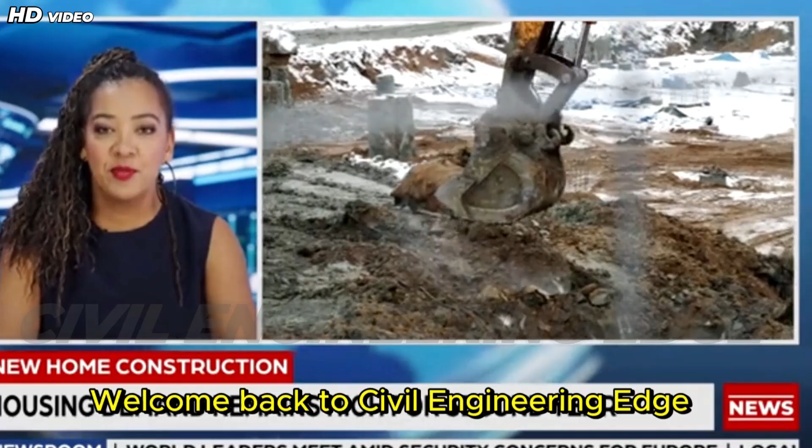Today's topic is not science fiction. It is not architectural fantasy. It is one of the most urgent engineering challenges of our time: how to build cities that float. Across the globe, coastal megacities are facing irreversible threats from rising sea levels, land subsidence, and intensifying storm surges. Traditional civil engineering solutions like seawalls, embankments, and land reclamation are proving to be temporary defenses against a permanent problem.

As professional civil engineers, researchers, and students, we must ask ourselves a bold question. If water is inevitable, why not design for it? In this episode, we will explore the engineering principles behind floating cities, focusing on hydrostatic equilibrium, buoyancy stability balance, modular honeycomb pontoons, and dynamic mooring systems. We will bridge theory with structural feasibility and examine how floating infrastructure may become the most resilient foundation for future civilizations. Let's begin. The reality of rising tides.

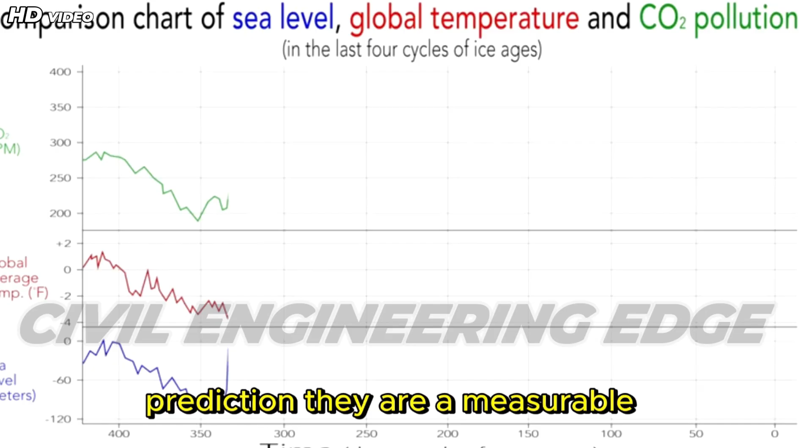Global sea levels are no longer a distant environmental prediction. They are a measurable engineering reality. According to long-term climate observations and oceanographic data, global mean sea levels have been rising at an accelerating rate over the last 3 decades. The implications for civil infrastructure are profound. Coastal regions are economic powerhouses. Over 40% of the global population lives within 100 kilometers of a coastline. These regions host ports, industrial corridors, airports, highways, power plants, and dense urban settlements. Yet, they are simultaneously the most vulnerable to storm surges, tidal amplification, and saline intrusion.

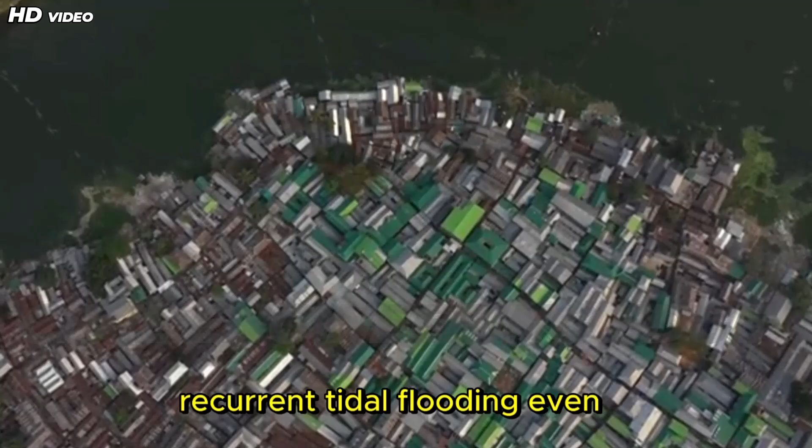Cities like Jakarta are sinking due to groundwater extraction and soft soil consolidation, compounding sea level rise effects. Miami experiences recurrent tidal flooding even without storms. Shanghai faces storm surge risks in one of the most densely populated deltas on Earth. From a structural perspective, the challenge is not just rising water levels, but dynamic loading from waves, tides, and extreme cyclonic events. Conventional foundation systems, isolated footings, raft foundations, and deep piles depend on stable soil strata.

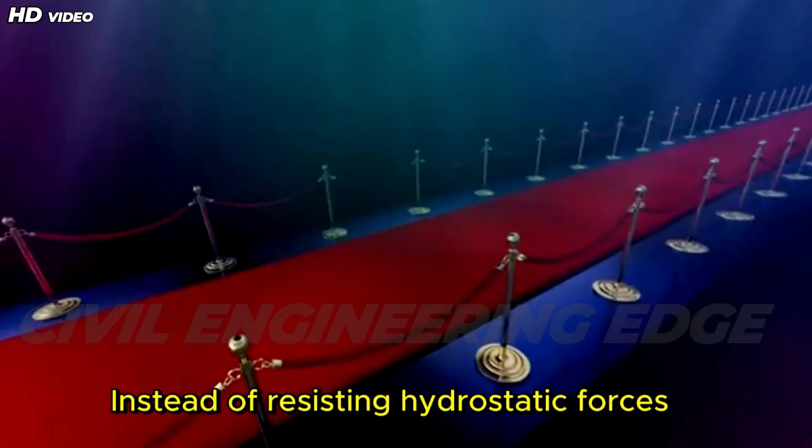But what happens when the soil itself becomes unstable due to erosion, liquefaction, or prolonged inundation? This is where traditional land-based engineering reaches its limitation. We are trying to anchor permanence in an increasingly fluid environment. Floating cities shift the design paradigm entirely. Instead of resisting hydrostatic forces, we embrace them. Instead of rigidly fixing structures to soil, we allow controlled movement through buoyancy-balanced platforms. By analyzing Archimedes' principle, center of buoyancy, metacentric height, and dynamic stability under wave excitation, engineers can design habitable structures that adapt rather than resist. The rising tide is not just an environmental crisis, it is a design challenge demanding innovation.

Reviewing current 2026 satellite data on coastal erosion and displacement risks. By 2026, satellite-based Earth observation systems provide unprecedented clarity on coastal transformation. Data from missions such as NASA and European Space Agency reveal accelerating shoreline retreat across multiple continents. Satellite altimetry measurements indicate consistent global sea level rise trends, while synthetic aperture radar (SAR) imagery highlights coastal subsidence in delta regions. Thermal imaging and ocean salinity mapping show expanding saltwater intrusion into freshwater aquifers, directly threatening municipal water supplies.

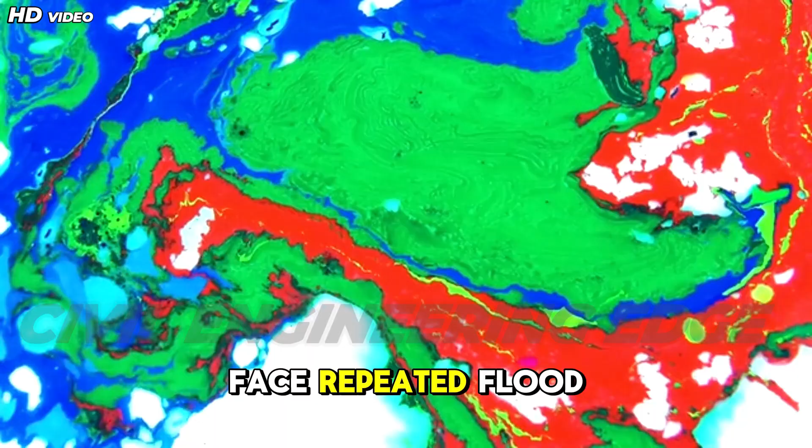Major urban hubs face immediate displacement risks. Low-lying island nations in the Pacific show measurable land loss. Delta cities experience both vertical land subsidence and horizontal shoreline erosion. Industrial port zones face repeated flood damage, disrupting global supply chains. By integrating satellite-derived digital elevation models, DEMs, with predictive hydrodynamic simulations, engineers can now model 50-year and 100-year flood scenarios with improved precision. The alarming conclusion: many coastal infrastructures were never designed for the magnitude and frequency of flooding now being recorded.

From a civil engineering standpoint, these data sets are not merely environmental indicators, they are design inputs future infrastructure must account for: higher baseline sea levels, increased storm surge heights, stronger cyclic wave loading, extended flood durations. Satellite data confirms a critical insight. Retrofitting existing coastal defenses may not be sufficient in highly vulnerable zones. In several metropolitan regions, managed retreat or adaptive infrastructure may become more economical than continuous repair and reinforcement.

Floating infrastructure emerges as a strategic alternative. Instead of constantly elevating land-based structures, floating systems automatically adjust to changing water levels, maintaining consistent freeboard height relative to the water surface. In essence, satellite evidence validates the engineering logic behind maritime urbanism. Why traditional seawalls and land reclamation are no longer viable long-term.

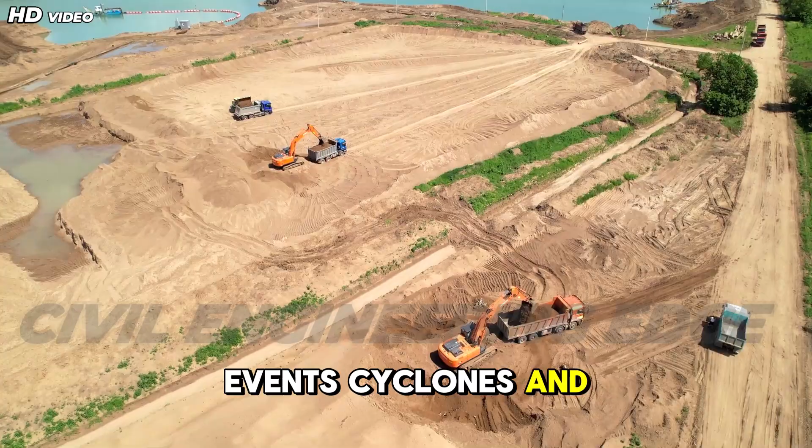Second, extreme weather events, cyclones, and superstorms generate surge levels that exceed original design assumptions. Designing for increasingly rare return periods, like 1 in 500-year storms, dramatically increases construction cost and carbon footprint.

Third, land reclamation projects require extensive soil stabilization, sand filling, and deep foundation systems. In delta regions with compressible clay deposits, long-term settlement becomes inevitable. Continuous maintenance becomes economically unsustainable.

Take, for example, Tokyo and New York City, both of which have invested heavily in coastal protection. While engineering efforts are impressive, the financial and environmental costs are immense and still not future-proof against accelerating sea level rise. Additionally, rigid coastal barriers disrupt marine ecosystems, sediment transport cycles, and tidal flow patterns. This can worsen erosion elsewhere along the coastline.

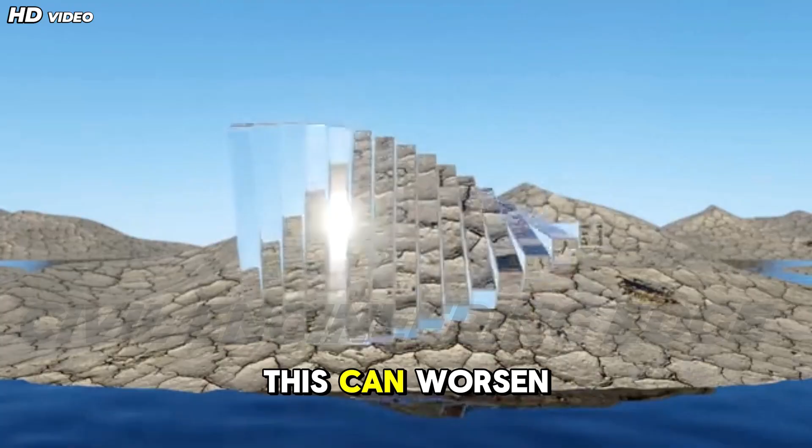From a structural systems perspective, seawalls represent a static solution to a dynamic problem. They assume that water levels can be permanently contained. But as global baselines rise, containment becomes progressively more complex and expensive.

Floating infrastructure, by contrast, does not resist rising water, it rises with it. Instead of increasing wall height every few decades, buoyant platforms maintain structural elevation automatically through hydrostatic equilibrium. Thus, the shift from rigid defense to adaptive design becomes not only logical but inevitable.

From fighting water to living with it: the rise of maritime urbanism. The concept of maritime urbanism challenges centuries of land-centric city planning. Instead of reclaiming land or fortifying coastlines, engineers design habitable environments directly on water surfaces.

Floating architecture is not new. Traditional floating villages have existed for centuries. However, scaling this concept to urban density requires advanced civil and marine engineering integration.

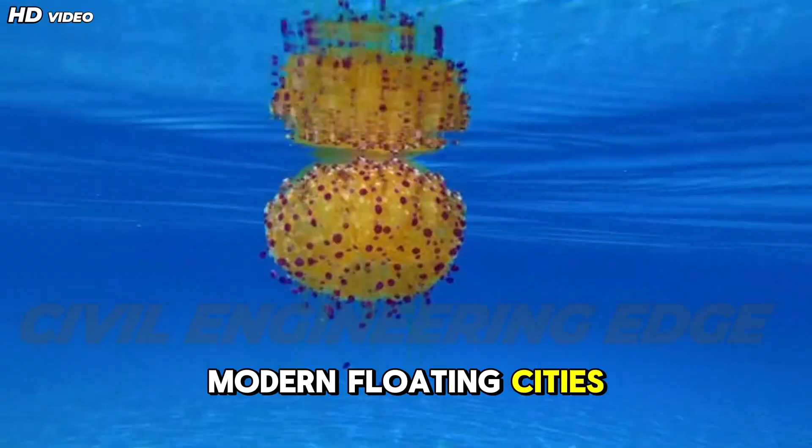Modern floating cities rely on modular honeycomb pontoons for distributed buoyancy, reinforced composite materials for corrosion resistance, dynamic mooring systems that absorb wave energy, and flexible utility networks for water, power, and waste.

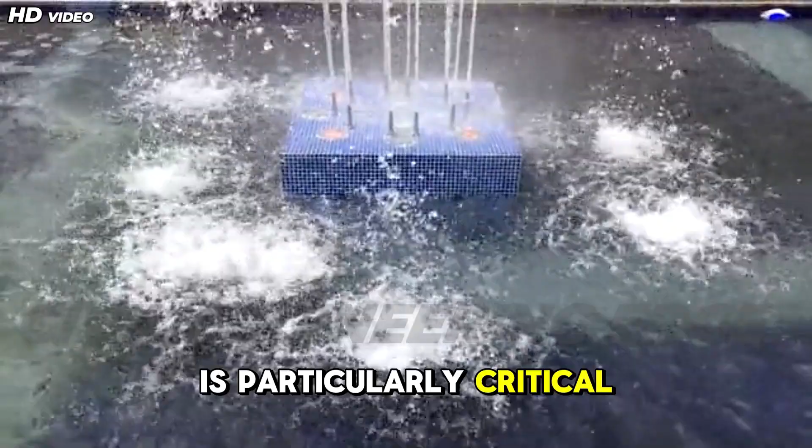The honeycomb pontoon configuration is particularly critical. By dividing large platforms into interconnected hexagonal buoyant cells, engineers achieve redundancy, enhanced stability, and improved load distribution. If one compartment is compromised, the entire structure remains operational.

Dynamic mooring systems using tension leg anchors or semi-taut moorings allow controlled horizontal movement while preventing drift. This reduces structural stress during tidal fluctuations and storm surges.

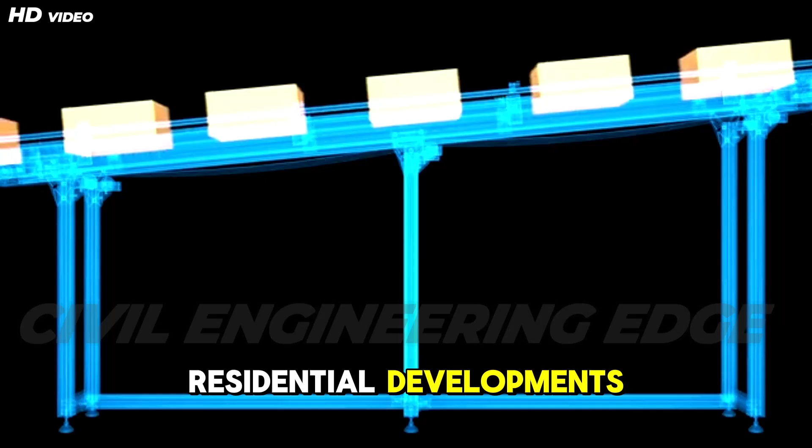Countries like the Netherlands, known for advanced water management strategies, are actively researching floating residential developments. Engineering firms are prototyping floating neighborhoods that integrate renewable energy systems and self-sustaining infrastructure.

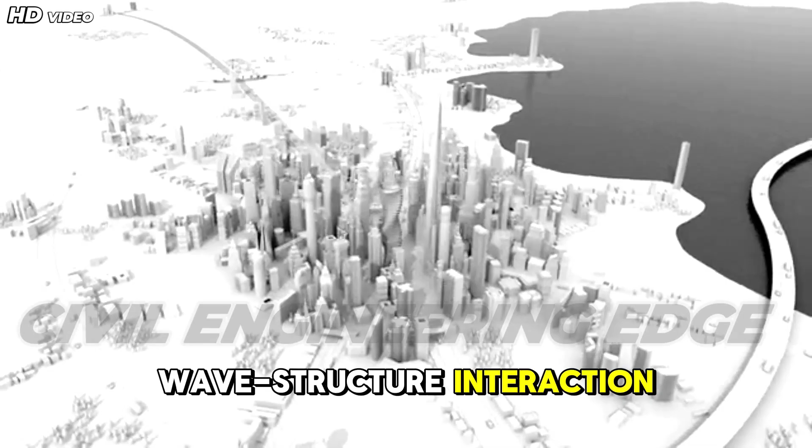From a hydrostatic standpoint, the key lies in maintaining proper metacentric height to ensure roll stability under wave excitation. Structural modeling must incorporate wave-structure interaction, fatigue analysis, and corrosion life cycle design.

Maritime urbanism represents a philosophical shift in civil engineering, not dominance over nature, but intelligent coexistence. Floating infrastructure does not surrender to rising seas. It adapts, stabilizes, and evolves with them.

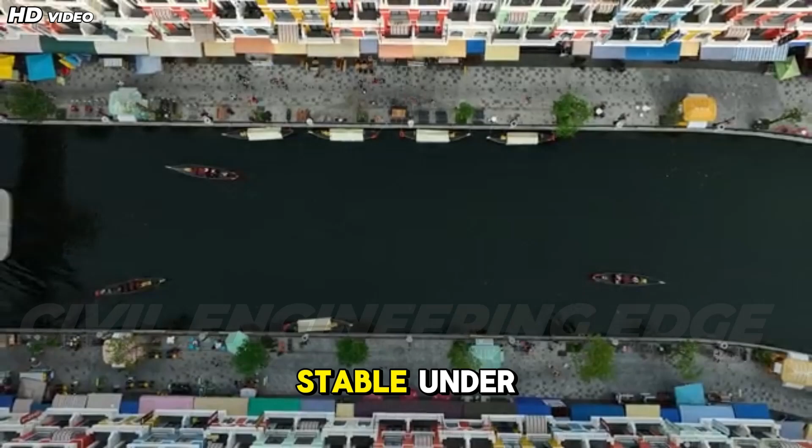The buoyancy stability paradox. When we speak about floating cities, the first engineering question that arises is simple yet profound. If something floats, can it remain stable under variable urban loads? This is what we call the buoyancy stability paradox.

In conventional marine engineering, buoyancy ensures flotation, but stability ensures survivability. For floating urban infrastructure, both must be optimized simultaneously at an unprecedented scale.

Buoyancy, governed by Archimedes' principle, states that a body immersed in fluid experiences an upward force equal to the weight of the displaced fluid. However, in large-scale floating platforms supporting buildings, vehicles, utilities, and dynamic human occupancy, flotation alone is insufficient. Stability becomes the controlling design parameter.

Unlike ships, which are designed for mobility and forward propulsion, floating cities must behave as semi-permanent, quasi-static structural systems. They must resist rotational instability (roll, pitch, and yaw), differential settlement effects due to uneven loading, and dynamic forces induced by waves, wind, and tidal surges.

The paradox lies in this. Increasing buoyancy through larger displacement volumes may enhance load carrying capacity, but can simultaneously reduce metacentric stability if the geometry is not optimized.

Professional civil engineers must analyze hydrostatic equilibrium conditions, ensuring that the center of gravity G, center of buoyancy B, and metacenter M maintain a stable relationship under both static and dynamic loading. The metacentric height GM must remain positive and sufficiently large to prevent capsizing tendencies.

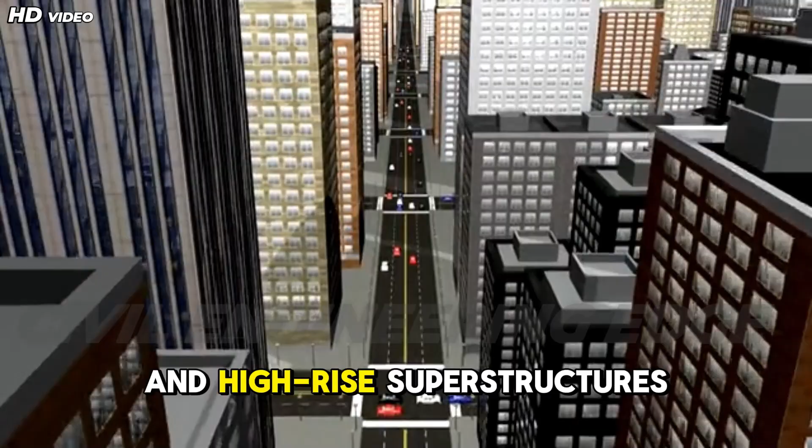Moreover, floating cities face unique urban load complexities: moving crowds, traffic clusters, localized infrastructure loads, and high-rise superstructures. These loads are neither uniform nor constant. Therefore, solving the buoyancy stability paradox requires integrating marine hydrodynamics, structural engineering, geotechnical analogs, and advanced materials science.

Only through modular platform geometry, distributed buoyancy systems, and dynamic anchoring can floating cities achieve the stability required for permanent habitation.

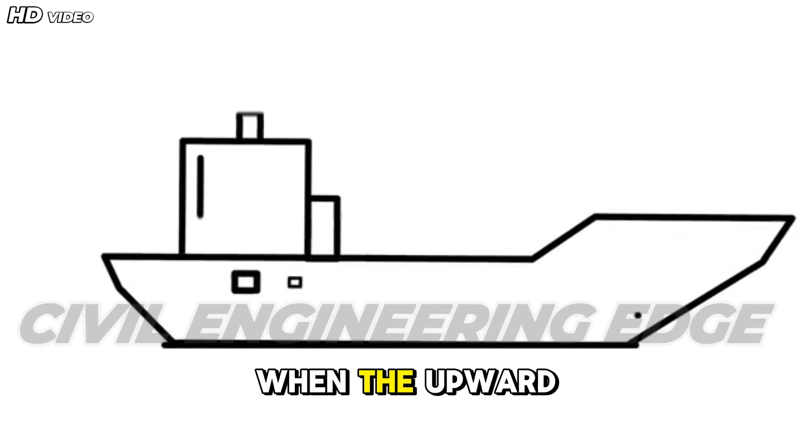Hydrostatic equilibrium and why traditional ship designs fail as permanent urban foundations. Hydrostatic equilibrium is achieved when the upward buoyant force equals the downward gravitational force acting on a floating body. In naval architecture, ships are designed to maintain this balance while moving through water.

However, ship stability criteria differ fundamentally from the requirements of floating urban foundations. Traditional ships are optimized for forward propulsion efficiency, minimal drag resistance, controlled roll response, flexible loading conditions, and cargo distribution changes. Their hull shapes are typically streamlined with curved sections that reduce hydrodynamic resistance.

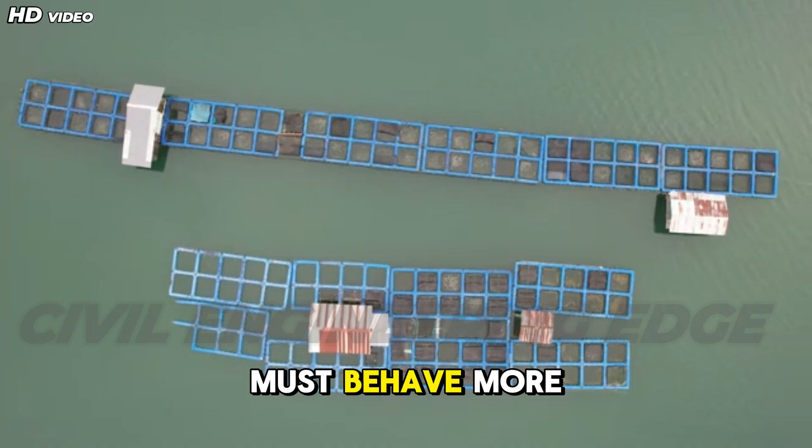While this geometry is ideal for movement, it is not ideal for stationary urban stability. For permanent floating cities, the structural system must behave more like a floating raft than a vessel. Ships rely heavily on ballast systems to adjust stability dynamically. In contrast, floating cities cannot depend on continuous ballast correction for everyday urban load variations.

Consider cruise liners or large maritime vessels. Even massive ships such as those operated by Royal Caribbean International experience noticeable roll motions during moderate wave conditions. While acceptable for transportation, such motion would be intolerable for residential or commercial urban life.

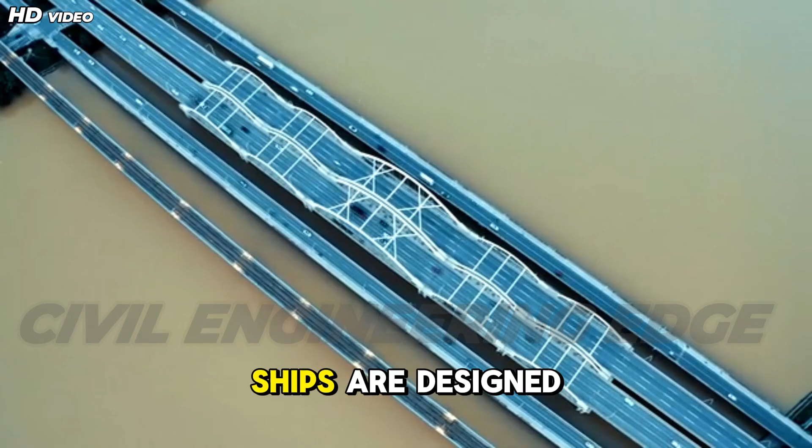Furthermore, ships are designed with high superstructures above the waterline, raising the center of gravity. This is manageable because the hull form and ballast compensate dynamically. But for floating urban platforms supporting multi-story buildings, excessive vertical mass concentration can reduce metacentric height and increase overturning risk.

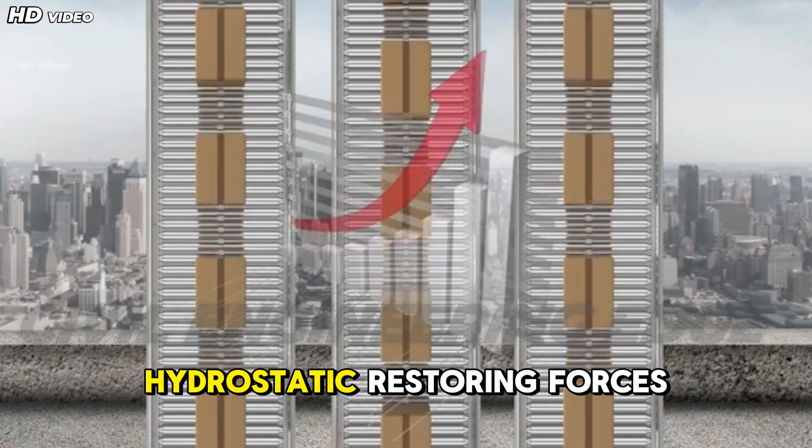Urban infrastructure also introduces rigid vertical loads: columns, shear walls, and core systems that behave differently from flexible ship superstructures. The response to wind-induced overturning moments must be considered alongside hydrostatic restoring forces. Therefore, traditional ship hull designs are insufficient for floating cities. Instead, wide-beam, flat-bottomed, multicellular pontoon systems offer greater transverse stability, reduced roll amplitude, and enhanced load distribution.

In summary, hydrostatic equilibrium for floating cities must prioritize long-term structural stability, not navigational performance. That distinction fundamentally separates maritime transport engineering from maritime urban engineering.

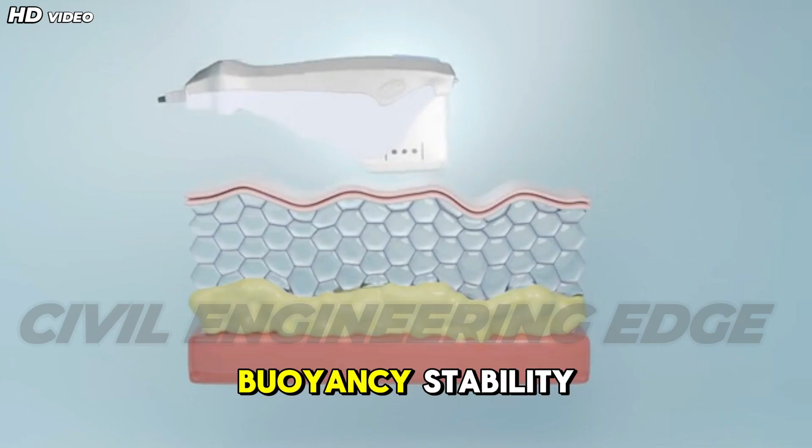Modular honeycomb pontoons and load distribution under uneven population density. One of the most innovative solutions to the buoyancy stability paradox is the use of modular honeycomb pontoon systems. Unlike single-hull floating platforms, honeycomb configurations divide the base into multiple interconnected buoyant cells arranged in hexagonal or grid-based geometry. Why honeycomb? Hexagonal geometry provides efficient space utilization, structural redundancy, and multi-directional load transfer.

Each cell functions as an independent buoyant chamber. When combined, they create a distributed flotation network rather than a single monolithic buoyant volume. In real urban scenarios, load distribution is never uniform. Imagine a floating city district where a stadium fills with 40,000 people. A commercial zone experiences peak occupancy. Residential towers vary in population density. Construction equipment concentrates temporarily in one zone.

If a single large pontoon supports all loads, uneven distribution may cause tilting or differential submergence. However, in a honeycomb system, localized loading increases displacement primarily in adjacent cells rather than affecting the entire platform. Each module can be designed with reinforced concrete or composite shell, internal watertight compartments, integrated utility corridors, load transfer beams

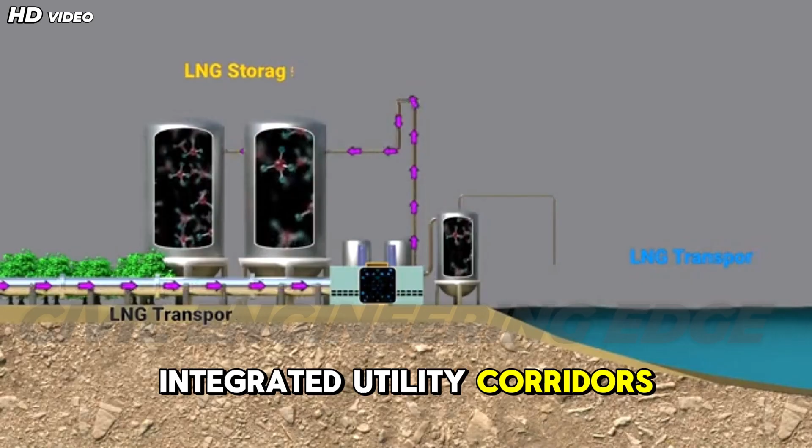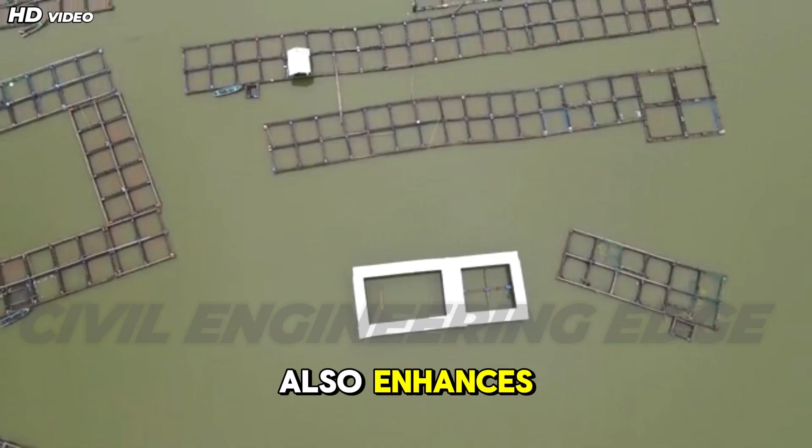connecting adjacent cells. When a localized load increases, the affected cells displace additional water, generating proportional buoyant force. Surrounding cells redistribute stresses through structural connectors, maintaining overall platform equilibrium. This modularity also enhances resilience. If one compartment is damaged due to collision or fatigue cracking, adjacent compartments maintain flotation integrity. This redundancy mirrors fail-safe principles used in offshore platforms and bridge engineering.

Countries such as the Netherlands have pioneered floating residential prototypes using modular platforms that demonstrate remarkable transverse stability under variable loads. From a structural analysis perspective, engineers must model load combinations (dead load plus live load plus environmental load), differential buoyancy response, shear transfer between modules, and fatigue due to cyclic wave loading.

The honeycomb pontoon system transforms floating cities from fragile floating decks into robust, scalable, and adaptable structural foundations capable of supporting complex urban ecosystems. Center of gravity versus center of buoyancy during massive tidal surges.

The stability of any floating structure depends on the geometric relationship between three critical points: 1. Center of gravity G. 2. Center of buoyancy B. 3. Metacenter M. The center of gravity represents the resultant point of all downward forces acting on the structure, including superstructures, utilities, occupants, and equipment. The center of buoyancy represents the centroid of displaced water volume. Under calm conditions, G and B align vertically.

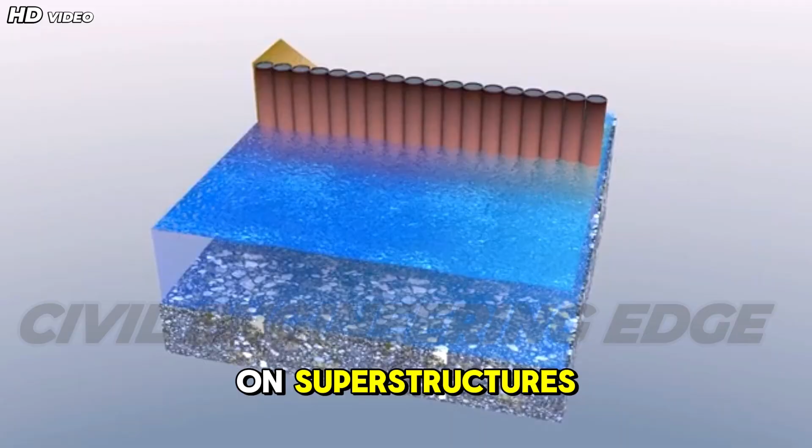During massive tidal surges, floating cities must handle sudden changes in water elevation, wave crest and trough differentials, lateral wind pressure on superstructures, and dynamic impact forces. If the center of gravity rises excessively due to tall buildings or concentrated rooftop loads, GM reduces. A small GM results in slow, large amplitude rolling, dangerous for structural systems and occupant comfort.

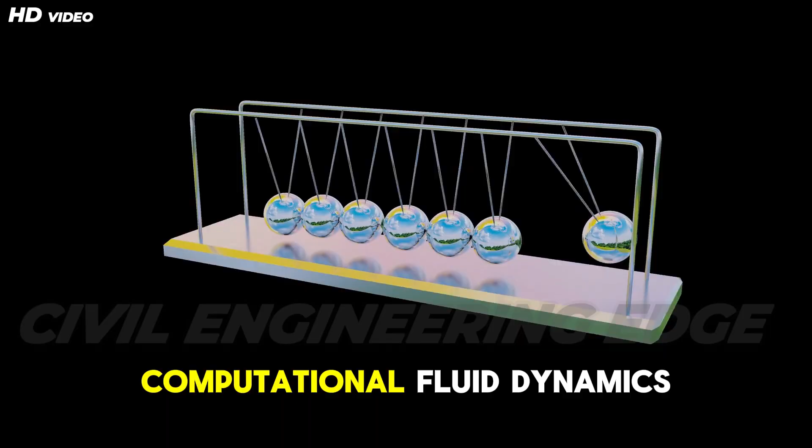Therefore, floating city design incorporates low-profile structural bases, distributed mass rather than vertical concentration, heavy infrastructure, water tanks, and mechanical systems placed near deck level, wide platform footprints to increase righting moments, and advanced computational fluid dynamics (CFD) simulations to model wave-structure interaction during extreme events. Offshore engineering practices used in oil platforms operated by organizations such as Shell plc provide valuable insight into dynamic stability under surge conditions.

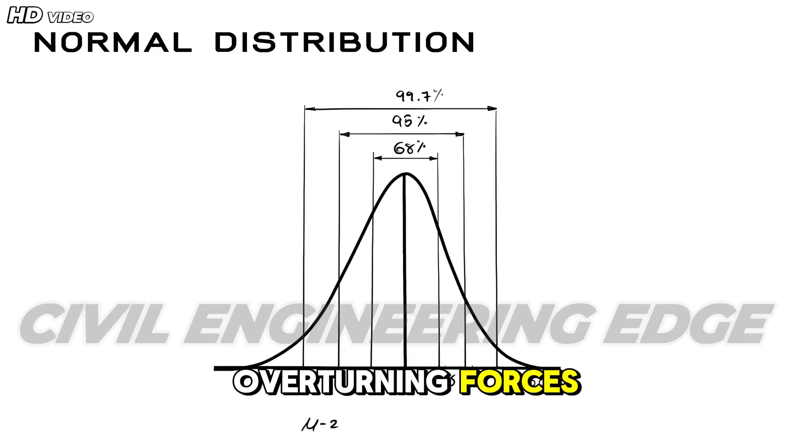The ultimate goal is controlled adaptability. As tides rise, the entire platform ascends uniformly. As waves induce tilt, restoring moments generated by buoyancy counteract overturning forces. By carefully managing the relationship between G, B, and M, floating cities can remain level, secure, and structurally sound even under the most severe tidal disturbances.

Advanced material science for longevity. If floating cities are to function as permanent urban ecosystems rather than experimental prototypes, material durability becomes the defining factor. Unlike conventional terrestrial structures, floating infrastructure is continuously exposed to aggressive marine environments, high salinity, chloride penetration, cyclic wetting and drying, ultraviolet radiation, biofouling, and constant dynamic loading. Over decades, these environmental stressors degrade traditional materials at accelerated rates.

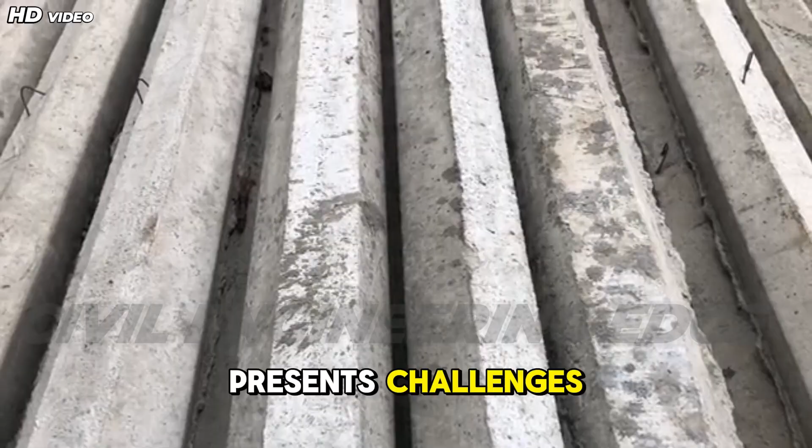Historically, marine structures relied on reinforced concrete and structural steel. While both materials have proven strength and versatility, their long-term durability in high salinity environments presents challenges. Chloride ions penetrate concrete cover, initiating corrosion in reinforcement bars. Steel components require continuous protective coatings and cathodic protection systems. Maintenance cycles become expensive and technically demanding, particularly in deep water conditions.

Advanced materials science in 2026 focuses on extending life cycle performance rather than merely increasing initial strength. The goal is to achieve 75 to 100-year service life with minimal intervention. This requires integrating corrosion-resistant composites, fiber-reinforced polymers (FRP), nano-enhanced concrete matrices, and hybrid material systems.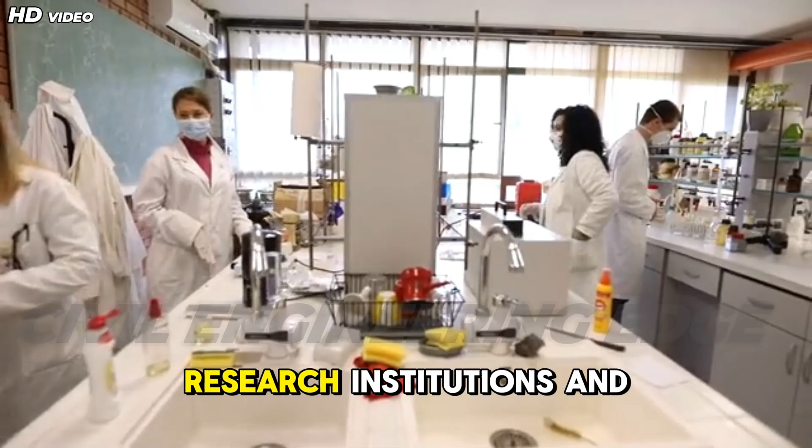Marine engineering research institutions and innovation programs supported by organizations such as MIT are developing high-performance composites that outperform traditional steel in corrosion resistance while maintaining comparable tensile capacity. These materials significantly reduce life cycle carbon emissions by lowering maintenance frequency.

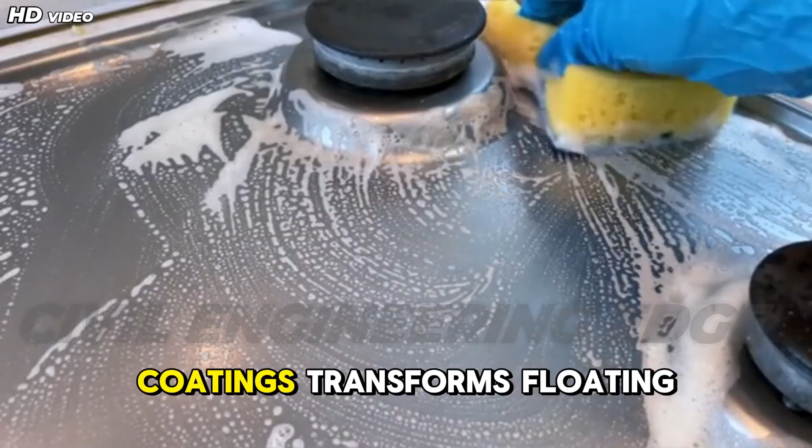Additionally, the integration of smart materials, self-healing polymers, and bioreceptive coatings transforms floating platforms into adaptive systems that strengthen over time instead of degrading. For professional civil engineers, this shift demands new design codes, new fatigue analysis methodologies, and new understanding of composite behavior under cyclic marine loading. Durability is no longer an afterthought, it is the foundation of floating urban resilience.

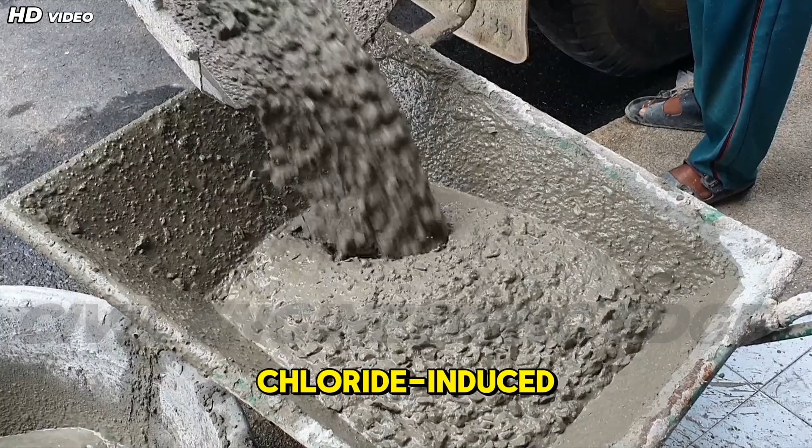Transitioning to 2026 grade corrosion-resistant composites. In high salinity marine environments, chloride-induced corrosion is the primary cause of structural degradation. Traditional carbon steel reinforcement, even with protective coatings, eventually experiences oxidation when chloride ions penetrate protective layers. This leads to cracking, spalling, and structural weakening. For floating cities designed to operate continuously offshore, such vulnerability is unacceptable.

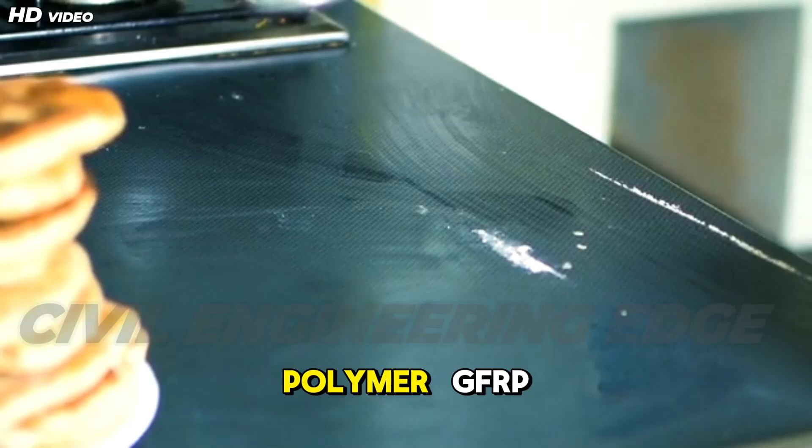The 2026 transition involves replacing conventional reinforcement and exposed steel elements with advanced corrosion-resistant composites. Glass fiber-reinforced polymer (GFRP), carbon fiber-reinforced polymer (CFRP), and basalt fiber composites are increasingly used as primary structural reinforcement alternatives. Unlike steel, FRP materials do not rust. Their tensile strength-to-weight ratio is significantly higher, reducing structural self-weight and lowering the center of gravity, an important factor in floating stability. Reduced weight directly enhances buoyancy efficiency and improves metacentric height.

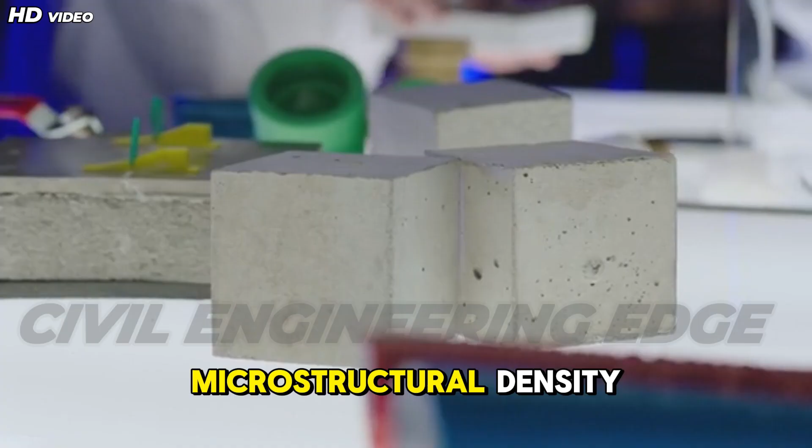Hybrid composite concrete systems now incorporate nanosilica additives, ultra-high-performance concrete (UHPC), and geopolymer binders that resist chloride penetration far better than traditional Portland cement concrete. These materials exhibit lower permeability and improved microstructural density. Marine-grade epoxy matrices used in composite systems are designed to resist ultraviolet degradation and hydrolysis.

Additionally, sacrificial anode systems are being supplemented with intelligent corrosion monitoring sensors embedded within structural members, allowing predictive maintenance rather than reactive repair. Research collaborations supported by organizations such as NASA have advanced composite technologies originally developed for aerospace applications. These high-performance materials are now being adapted for civil marine infrastructure.

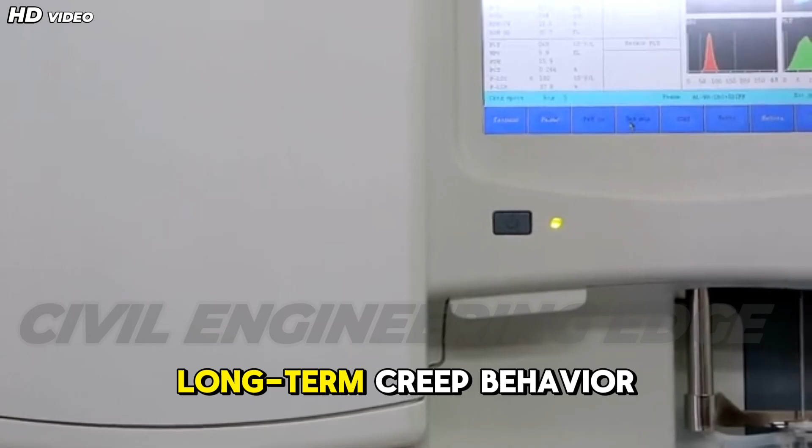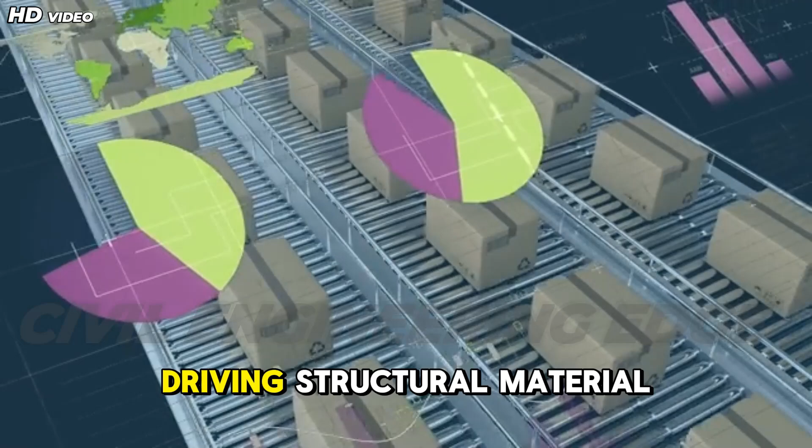However, composite materials introduce new challenges engineers must consider: long-term creep behavior, fire resistance and thermal expansion compatibility, connection detailing between composite and concrete, and fatigue performance under cyclic wave loading. Design codes are evolving to incorporate these materials into marine structural standards. The shift from steel-dominant systems to composite-integrated structures represents one of the most transformative changes in floating city engineering. Durability, weight reduction, and life cycle economy are now driving structural material selection.

Bioreceptive textures and coral strengthen structural bases. One of the most fascinating innovations in floating city infrastructure is the concept of bioreceptive surfaces, engineered textures designed to encourage marine life growth rather than prevent it. Traditionally, marine engineering viewed biofouling as a threat. Barnacles, algae, and coral accumulation were considered detrimental due to added weight and drag. However, the paradigm is shifting. Instead of resisting marine ecosystems, floating cities can integrate ecological engineering principles to strengthen their submerged structures over time.

Bioreceptive concrete incorporates microtextured surfaces and mineral compositions that promote coral larval attachment. Calcium-rich formulations and pH-balanced coatings encourage marine calcification. Over time, coral colonies attach and grow, forming a natural reinforcement layer around submerged pontoons. This concept is inspired by artificial reef projects and coastal restoration initiatives supported by organizations like the National Oceanic and Atmospheric Administration, which demonstrate how engineered substrates can accelerate coral regeneration.

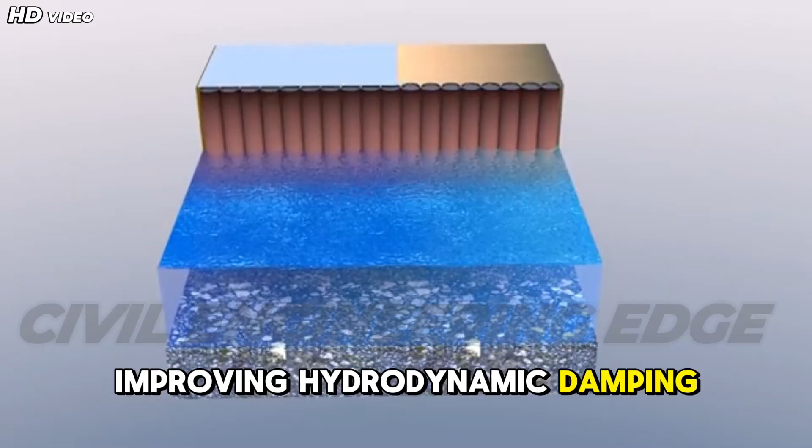From a structural standpoint, coral growth can increase surface roughness, improving hydrodynamic damping, provide additional protective layering against erosion, enhance local marine biodiversity, and improve structural integration with surrounding ecosystems. Careful structural modeling is required to account for additional dead load from marine growth. However, this load is typically distributed and incremental, allowing gradual adjustment in buoyancy calculations.

Bioreceptive materials also improve environmental acceptance of floating cities. Instead of displacing marine life, platforms become ecological hubs, supporting reef systems and fish populations. For civil engineers, this introduces interdisciplinary collaboration with marine biologists and environmental scientists. Material selection must balance structural strength, chemical stability, and ecological compatibility. Floating cities thus evolve into hybrid infrastructure, part engineered structure, part living marine ecosystem, strengthened naturally over time rather than deteriorating.

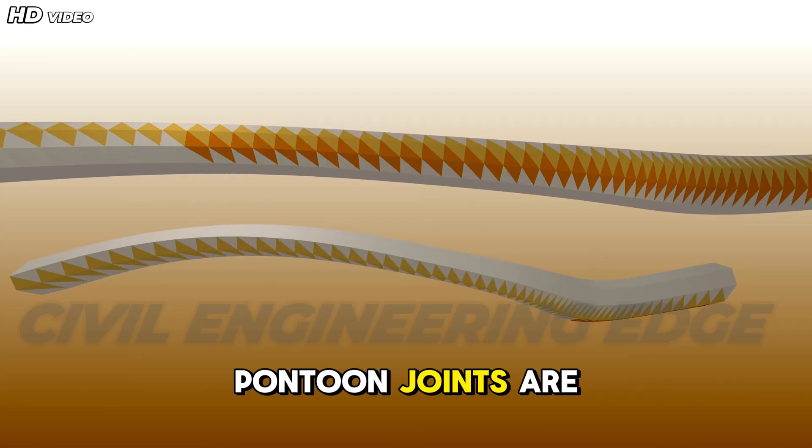Self-healing polymers in pontoon joints for deep water durability. Pontoon joints are critical stress concentration zones in modular floating platforms. These joints experience cyclic tensile, compressive, and shear forces due to wave action, thermal expansion, and dynamic loading. Over time, microcracks develop within connection materials, potentially compromising watertight integrity and structural continuity.

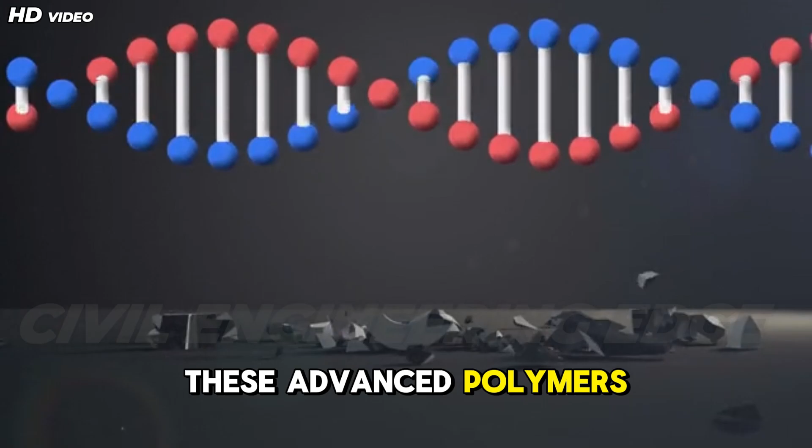To minimize long-term maintenance costs, engineers are integrating self-healing polymer technologies into pontoon joint systems. These advanced polymers contain microencapsulated healing agents or reversible chemical bonds that activate when cracks form. When microcracks appear, embedded capsules rupture, releasing bonding agents that chemically seal the crack. Other polymer systems rely on thermally reversible cross-linking reactions that reform molecular bonds after mechanical damage.

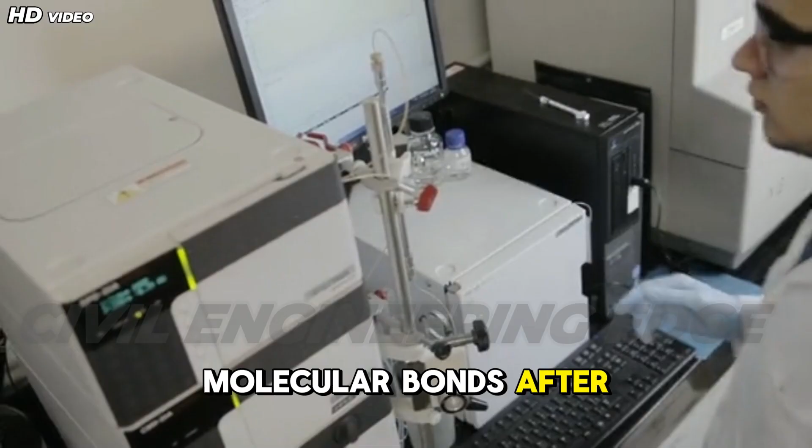Research programs supported by institutions such as Stanford University have demonstrated polymer systems capable of restoring up to 90% of original tensile strength after crack formation. In floating city applications, self-healing materials are used in flexible expansion joints between pontoon modules, waterproof membranes in submerged compartments, protective coatings on structural connectors, and composite joint interfaces.

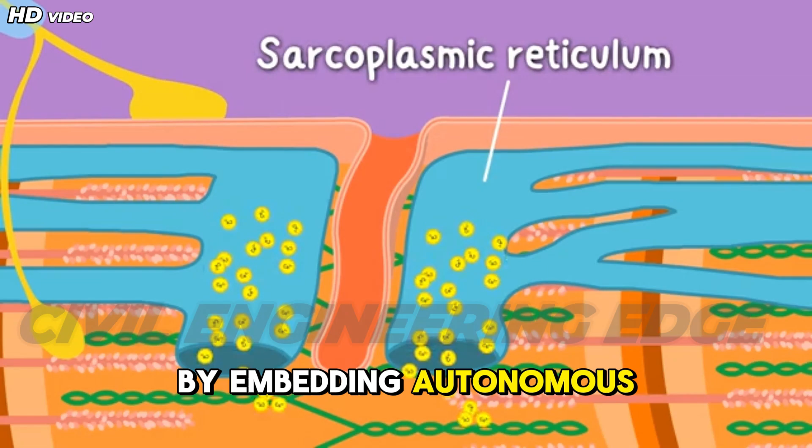The economic benefits are substantial. Offshore maintenance operations are expensive due to access constraints, specialized equipment, and safety risks. By embedding autonomous repair capability into the structure itself, life cycle costs are significantly reduced. From a structural reliability perspective, self-healing systems enhance redundancy. Small defects do not propagate into catastrophic failures. Instead, they are contained at microscale levels.

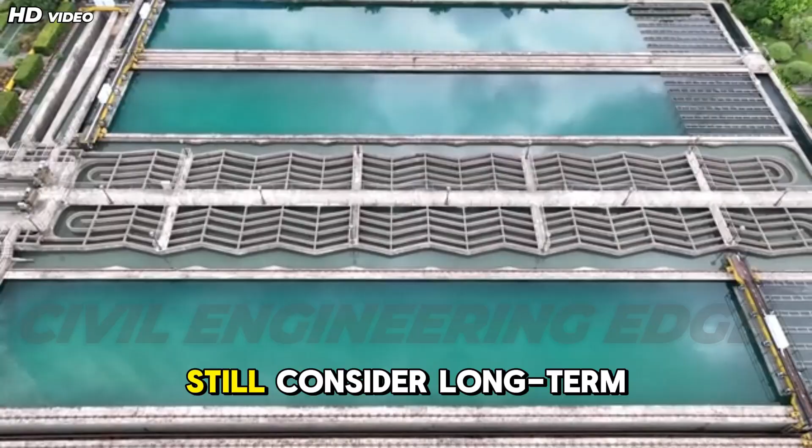Engineers must still consider long-term performance limits, healing cycle frequency, and environmental compatibility. However, early field deployments in offshore energy platforms show promising results. By integrating corrosion-resistant composites, bioreceptive surfaces, and self-healing polymers, floating cities transition from vulnerable marine structures to resilient, adaptive infrastructure systems capable of surviving decades in harsh ocean environments.

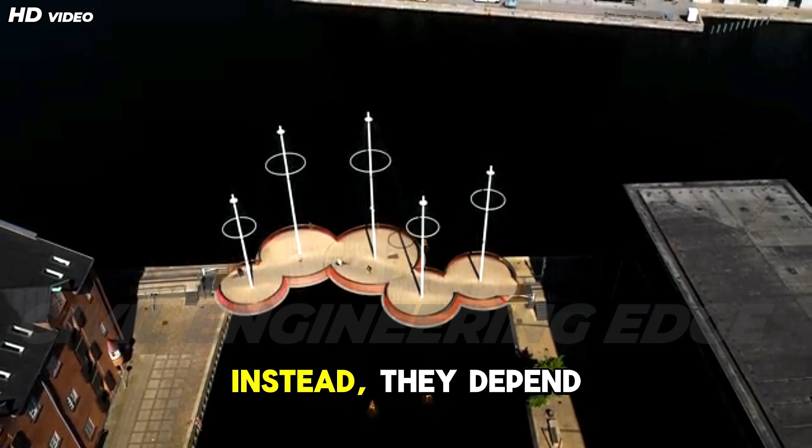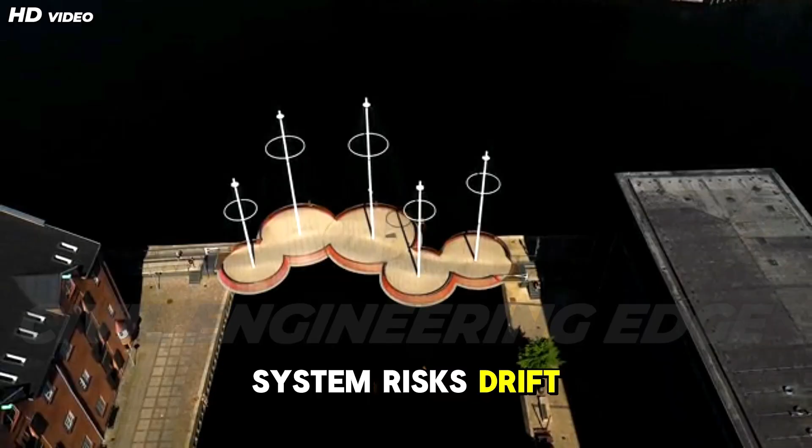Dynamic mooring and infrastructure. Floating cities cannot rely on conventional fixed foundations such as pile caps, raft foundations, or caisson systems anchored into stable soil strata. Instead, they depend on advanced mooring technologies that provide positional stability while allowing controlled vertical and horizontal movement. The challenge lies in balancing restraint and flexibility. Too rigid a mooring system transfers excessive stress to the floating platform during storm events. Too flexible, a system risks drift, collision between modules, or excessive oscillation.

Dynamic mooring systems are inspired by offshore oil and gas platforms, yet they must operate with far greater precision for urban environments. Unlike industrial platforms, floating cities must ensure occupant comfort, utility continuity, and structural reliability under frequent tidal fluctuations and extreme weather events. Modern mooring configurations include tension leg platforms (TLP), semi-taut mooring lines, catenary anchor systems, and hybrid elastic polymer tether systems. These systems use high-strength synthetic fiber ropes, corrosion-resistant chain segments, and deep-sea anchors embedded into seabed strata.

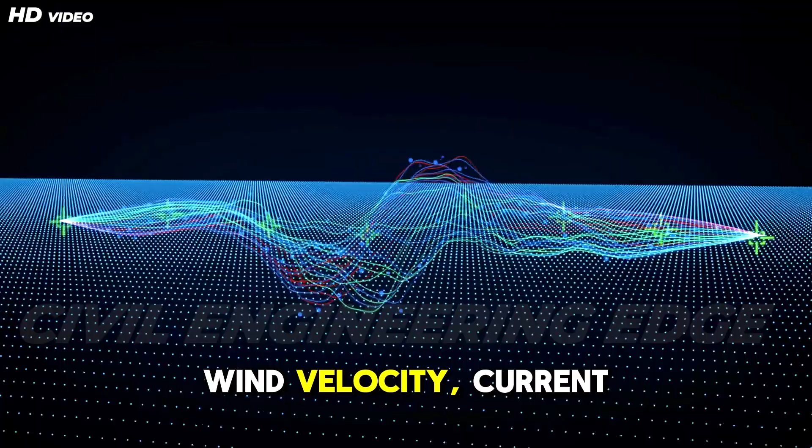However, the real breakthrough in 2026 lies in integrating real-time monitoring, predictive analytics, and AI-driven tension adjustment systems. Instead of being passive anchoring elements, mooring systems now function as adaptive structural components. Sensors measure wave height, wind velocity, current speed, and platform displacement. Algorithms adjust cable tension accordingly, distributing forces across multiple anchor points. This transforms floating cities from loosely anchored structures into intelligent, self-adjusting infrastructure networks capable of withstanding tidal surges and extreme storm loading while maintaining stability and alignment.

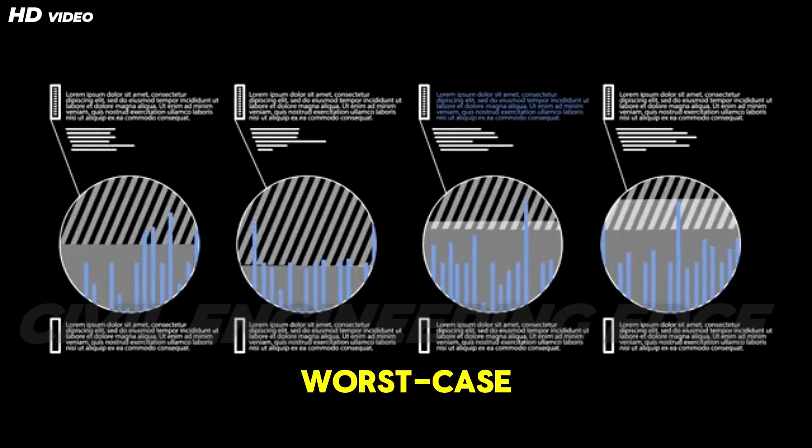AI-driven mooring systems and real-time tension adjustment. Traditional mooring systems are designed based on worst-case environmental loading scenarios using deterministic design methods. Engineers calculate maximum expected wave height, current velocity, and wind pressure, then size mooring lines accordingly. While safe, this approach results in conservative overdesign and inefficient stress distribution during moderate conditions. In contrast, AI-driven mooring systems operate dynamically.

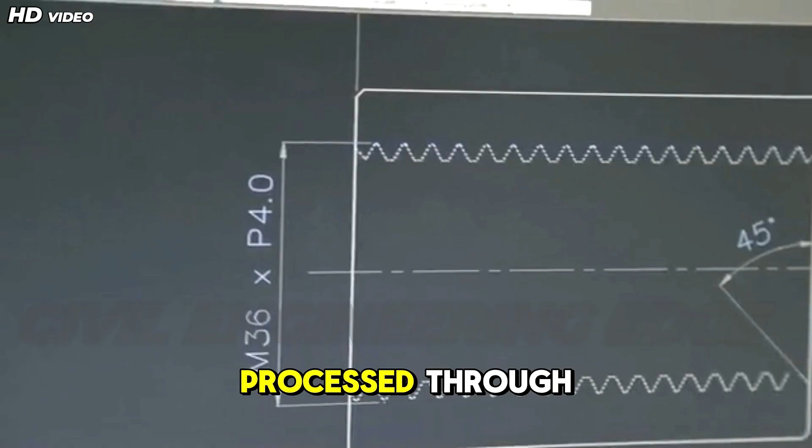High-precision sensors embedded in anchor points and tether lines continuously monitor wave amplitude and frequency, platform roll, pitch, and yaw angles, cable strain and elongation, and seabed anchor movement. These data streams are processed through predictive control algorithms that anticipate force spikes before they peak. Actuated winches and smart tensioning devices adjust cable lengths and stiffness in real time, redistributing loads evenly across the mooring network. This technology draws inspiration from advanced offshore installations, such as those deployed by Equinor, where floating energy platforms must survive severe North Sea conditions.

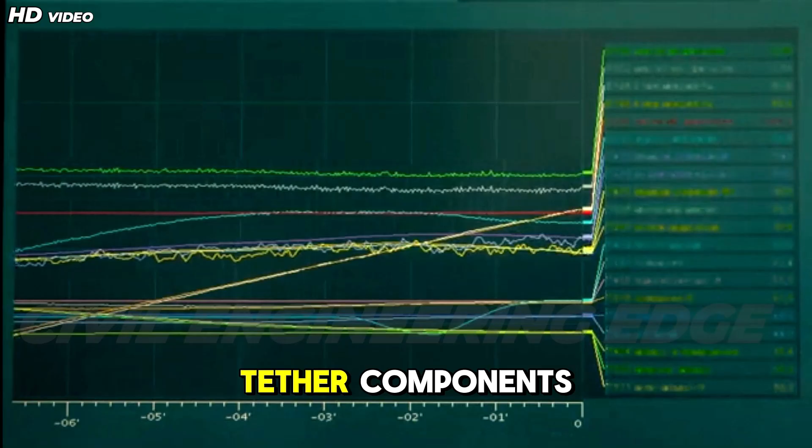For floating cities, AI-driven mooring provides several critical advantages. One, reduced peak stress in structural joints. Two, improved comfort by minimizing excessive sway. Three, increased fatigue life of tether components. Four, enhanced resilience during storm surges. In extreme weather, the system can temporarily increase stiffness to limit horizontal displacement. During calm conditions, tension is relaxed to reduce material fatigue.

Engineers must integrate structural dynamics modeling, machine learning algorithms, and marine geotechnical anchoring analysis to ensure system reliability. Redundant control systems are essential to prevent failure during power interruptions. The shift from passive anchoring to intelligent mooring marks a fundamental evolution in marine civil engineering. Foundations are no longer static; they are responsive, predictive, and adaptive.

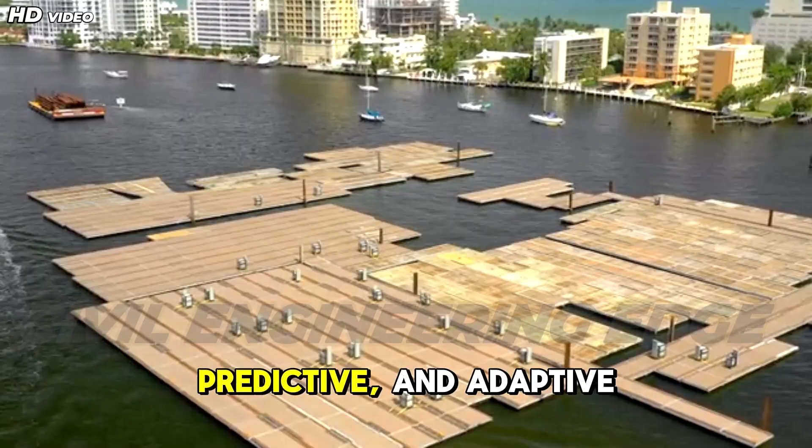Flexible utility umbilicals for moving city modules. A floating city is not a single rigid block; it is a modular assembly of interconnected platforms. As these modules respond to tides, waves, and dynamic mooring adjustments, slight relative movement occurs between them. Traditional rigid utility connections would fracture under such motion. To address this, engineers implement flexible infrastructure umbilicals.

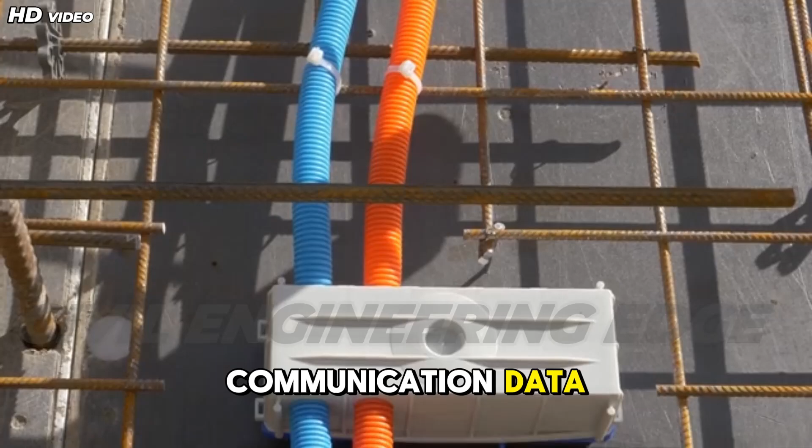These are bundled, high-performance conduits designed to transfer power, potable water, wastewater, communication data, and sometimes hydrogen fuel between modules without compromising structural independence. Flexible umbilicals are adapted from subsea energy systems used in offshore production platforms. They consist of multi-layer polymer sheathing, corrosion-resistant metallic reinforcement, pressure-resistant internal tubing,

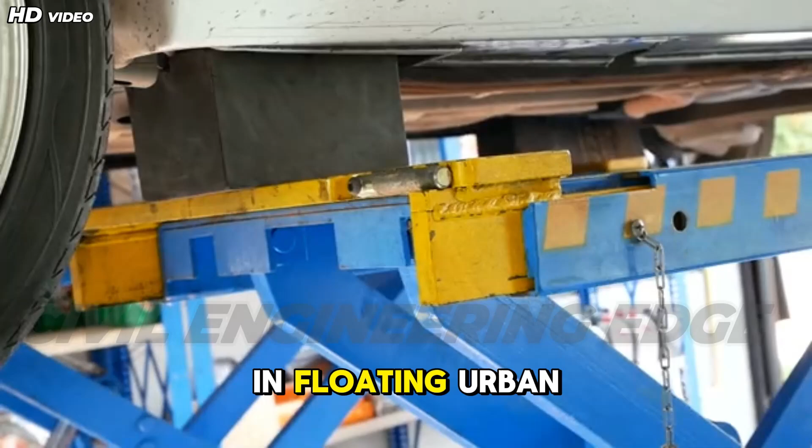fiber optic data cores. The design must account for repeated bending cycles, torsional stress, and long-term fatigue due to wave-induced oscillations. In floating urban systems, utility umbilicals are routed through articulated joints equipped with shock absorbers and expansion compensators. These joints ensure continuous service even when adjacent modules experience differential motion.

For power transmission, floating grids may incorporate high-voltage subsea cables similar to those used in offshore wind farms developed by companies such as Siemens Energy. These cables are designed for marine durability and electromagnetic shielding. Water and wastewater systems utilize flexible HDPE or composite pipelines with leak detection sensors. Real-time monitoring ensures rapid identification of microfractures before system failure.

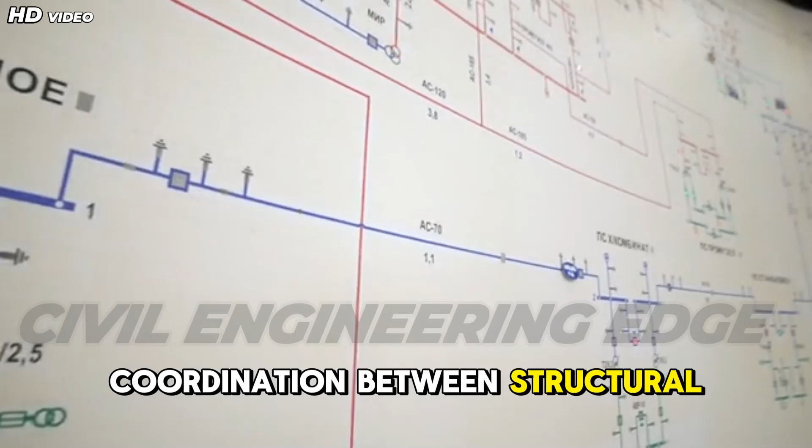Data transfer infrastructure integrates fiber optic cores capable of supporting high-bandwidth communication networks required for smart city operation. From a civil engineering perspective, the integration of flexible utilities demands multidisciplinary coordination between structural, electrical, mechanical, and marine engineers. Proper detailing at connection nodes is essential to avoid stress concentration and fatigue cracking. Flexible umbilicals enable floating cities to behave like living organisms. Modules move independently, yet remain seamlessly connected through resilient infrastructure networks.

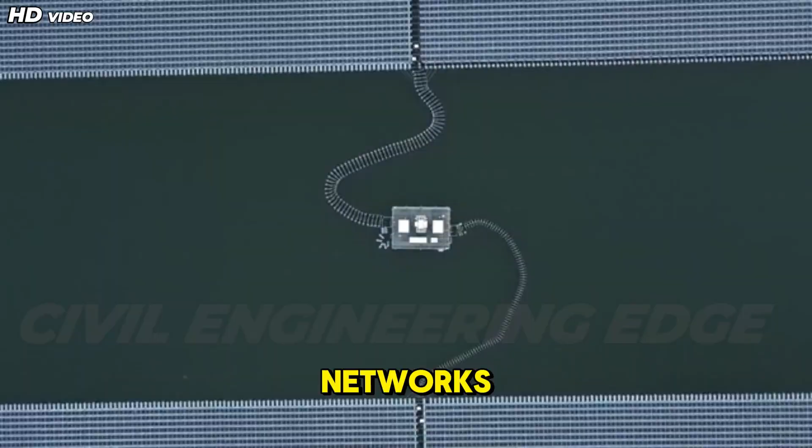Pilot projects in the Maldives and Busan as scalable blueprints. Theoretical models of floating cities are now transitioning into real-world pilot projects. Two of the most significant examples are located in Maldives and Busan. The Maldives Floating City project is being developed as a climate-adaptive residential community designed to accommodate thousands of residents. The nation faces existential risk due to rising sea levels, making floating infrastructure a practical necessity rather than experimental ambition.

The project integrates modular floating platforms arranged in lagoon-friendly configurations. Mooring systems allow vertical tidal adjustment while maintaining lateral stability. Renewable energy integration, desalination plants, and decentralized wastewater treatment systems are incorporated into each module.

Similarly, Busan is advancing a floating district concept supported by international collaboration and smart city integration. The design emphasizes scalable modules that can expand outward without requiring seabed reclamation. Renewable energy sources such as offshore solar arrays and wave energy converters are being evaluated to support autonomous power grids.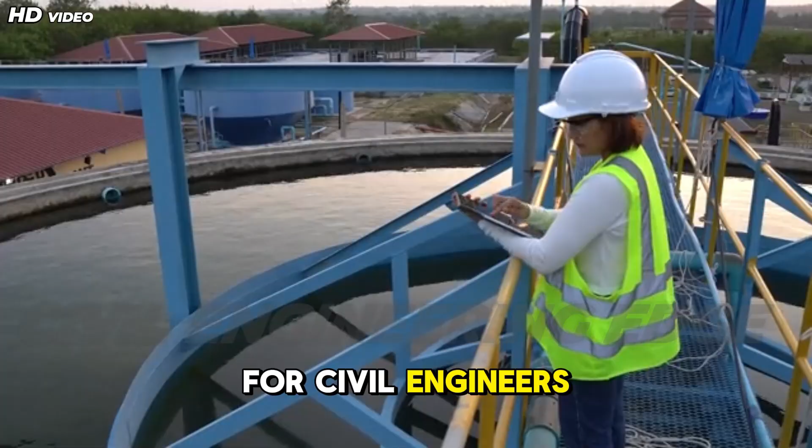These pilot initiatives demonstrate several engineering breakthroughs: scalable modular expansion, integrated dynamic mooring systems, renewable marine-based power generation, smart grid interconnectivity. For civil engineers, these projects serve as real-world laboratories. Structural performance, environmental integration, and life cycle maintenance strategies are being tested under operational conditions. Most importantly, these pilots show that floating infrastructure is not speculative, it is implementable.

Lessons learned from the Maldives and Busan can inform future developments in coastal regions worldwide. Floating cities are transitioning from concept renderings to engineered realities. And as these pilot projects scale, they will define the standards for resilient ocean-based infrastructure systems capable of supporting future global populations.

Flexible utility umbilicals for moving city modules. A floating city is not a single rigid block, it is a modular assembly of interconnected platforms. As these modules respond to tides, waves, and dynamic mooring adjustments, slight relative movement occurs between them. Traditional rigid utility connections would fracture under such motion. To address this, engineers implement flexible infrastructure umbilicals.

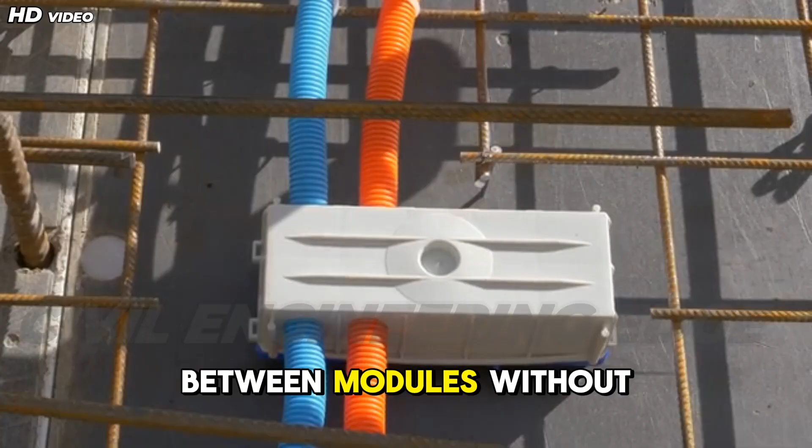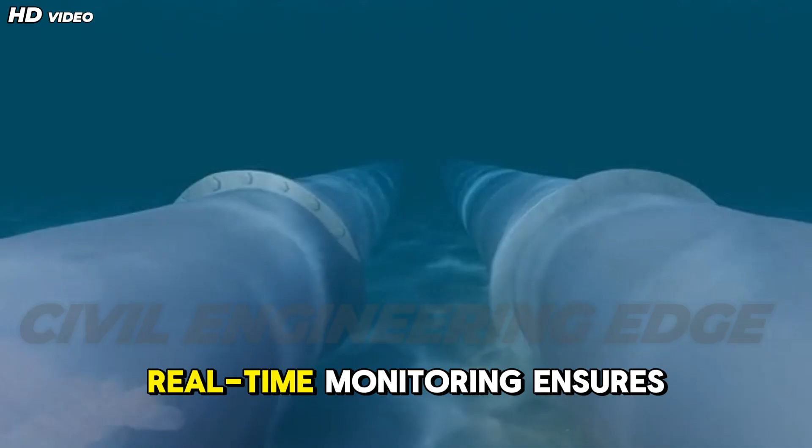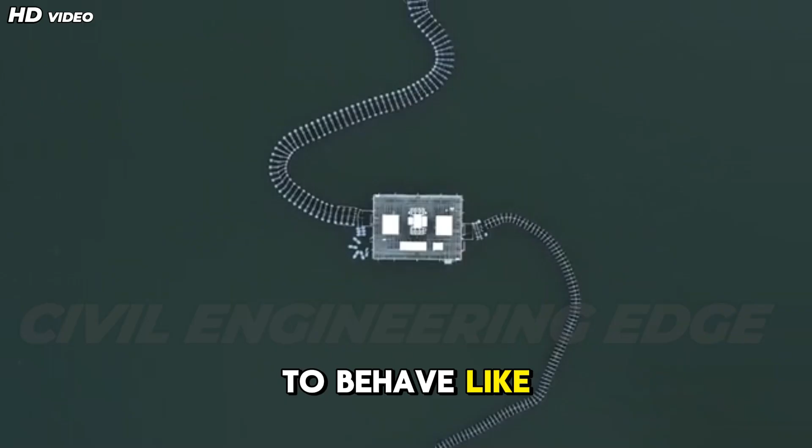These are bundled, high-performance conduits designed to transfer power, potable water, wastewater, communication data, and sometimes hydrogen fuel between modules without compromising structural independence. (Repeated section.)

The nation faces existential risk due to rising sea levels, making floating infrastructure a practical necessity rather than experimental ambition. The project integrates modular floating platforms arranged in lagoon-friendly configurations. Mooring systems allow vertical tidal adjustment while maintaining lateral stability. Renewable energy integration, desalination plants, and decentralized wastewater treatment systems are incorporated into each module.

Similarly, Busan is advancing a floating district concept supported by international collaboration and smart city integration. The design emphasizes scalable modules that can expand outward without requiring seabed reclamation. Renewable energy sources such as offshore solar arrays and wave energy converters are being evaluated to support autonomous power grids.

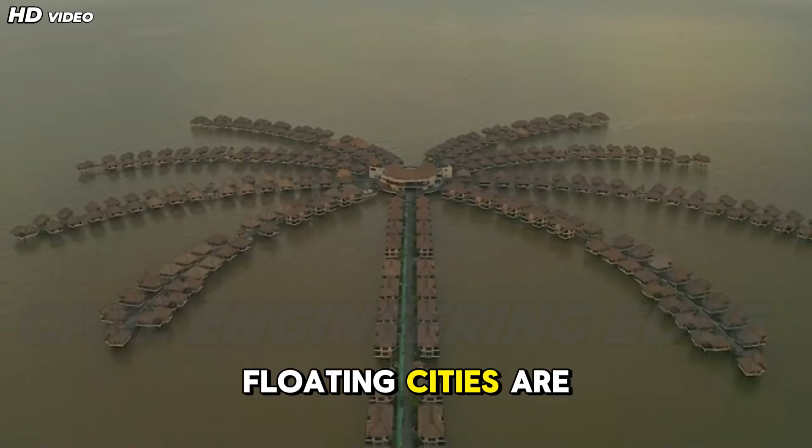Floating cities are not merely engineering responses to rising sea levels, they represent the potential birth of sovereign maritime states. When infrastructure becomes mobile, adaptive, and ocean-based, the geopolitical, economic, and legal frameworks of civilization begin to evolve. Traditionally, sovereignty has been tied to landmass. Borders are drawn on fixed geography. But floating urban systems introduce the possibility of semi-autonomous or fully autonomous maritime jurisdictions operating beyond vulnerable coastlines.

From a civil engineering standpoint, sovereignty begins with infrastructure independence. A floating state must possess its own structural foundation, energy systems, water production, food cultivation, waste recycling, communication networks, and governance facilities. Engineering is no longer just about supporting buildings, it becomes the backbone of national resilience.

International maritime law, including frameworks monitored by organizations such as the United Nations, currently governs territorial waters and exclusive economic zones. However, floating cities operating in international waters introduce new policy considerations regarding taxation, environmental responsibility, and political identity.

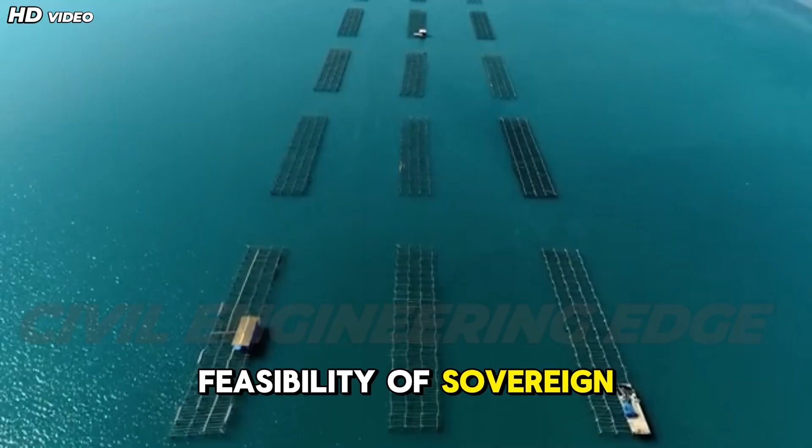The engineering feasibility of sovereign maritime states depends on structural permanence, durability, and economic viability. Modular platforms must withstand decades of marine exposure. Mooring systems must allow repositioning when required. Utility grids must function independently from terrestrial networks.

For civil engineers and planners, this represents a paradigm shift. Infrastructure is no longer anchored permanently to land. Instead, it becomes dynamic, scalable, and geopolitically transformative. Floating states can redefine resilience not as resistance to environmental forces, but as the freedom to adapt geographically and economically.

Socio-economic impact of mobile cities. Mobile floating cities introduce a revolutionary socio-economic model. Unlike traditional urban centers fixed in place, these cities can relocate in response to economic opportunities, environmental risks, or geopolitical changes. This mobility transforms infrastructure into a strategic asset.

For example, if trade routes shift due to new maritime corridors or climate-induced Arctic openings, a floating commercial hub could reposition itself closer to emerging economic zones. Instead of constructing entirely new ports and logistics networks, the city itself moves to align with global trade patterns.

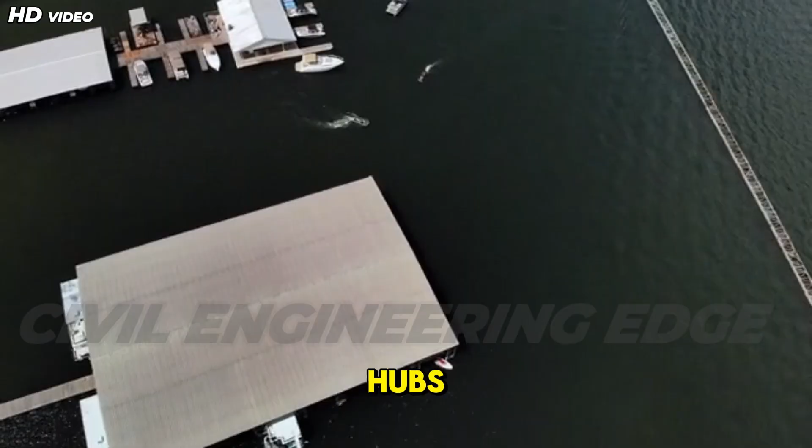From a labor and employment perspective, floating cities may foster specialized marine industries, offshore renewable energy, aquaculture, desalination technology, and marine biotechnology. Economic clustering could occur around floating innovation hubs, attracting engineers, scientists, and entrepreneurs.

Urban mobility also influences real estate economics. Property ownership models may shift toward modular leasing frameworks rather than land-based speculation. Infrastructure financing models could evolve into maritime bonds or ocean-based development funds. However, engineers must design structural systems capable of safe relocation. Modular segmentation, detachable mooring systems, and flexible utility connectors are essential to enable controlled repositioning without service disruption.

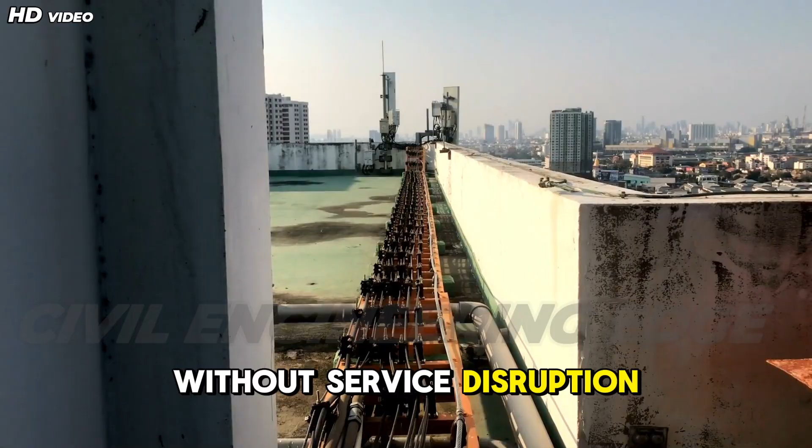Global economic organizations such as the World Economic Forum have highlighted the importance of climate-adaptive infrastructure in maintaining economic stability. Floating cities represent one of the most proactive approaches to climate resilience. In essence, mobile cities convert vulnerability into flexibility. They provide economic continuity even as environmental conditions evolve.

Scalability of floating districts into fully autonomous, zero-carbon civilizations. Scalability is the defining engineering principle that determines whether floating districts remain experimental coastal projects or evolve into fully autonomous maritime civilizations. A single floating neighborhood demonstrates structural feasibility. However, a network of interconnected, energy-independent, resource-efficient districts demonstrates systemic sustainability.

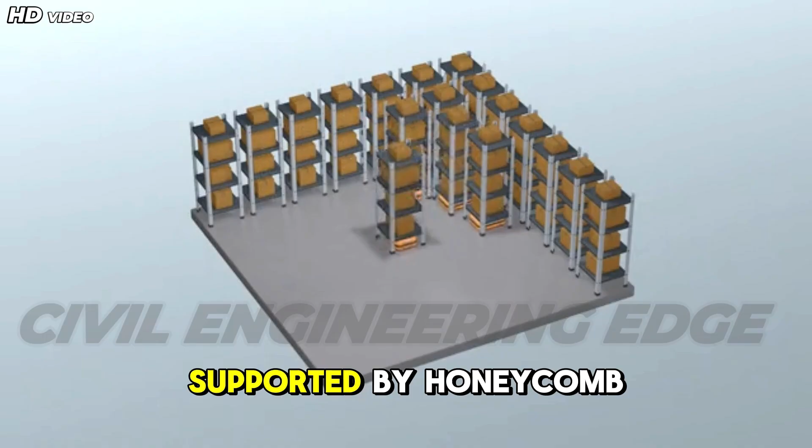The transition from district to civilization requires infrastructure that is modular, redundant, and capable of exponential expansion without destabilizing the base platform. The scalability model begins with modular replication. Each floating district is designed as a structurally independent unit, supported by honeycomb pontoon foundations, dynamic mooring systems, and integrated utility corridors. These districts function as plug-and-play infrastructure blocks.

When population demand increases, new modules are attached laterally without overloading existing buoyancy systems. Structural expansion does not require dredging, land reclamation, or permanent seabed modification. Energy autonomy is central to zero-carbon scalability.

Floating civilizations have direct access to marine renewable energy resources, including offshore wind, floating photovoltaic arrays, tidal turbines, and wave energy converters. Hybrid microgrids distribute power across districts while maintaining decentralized redundancy. Lessons from large-scale offshore wind integration projects supported by the International Renewable Energy Agency demonstrate how renewable-heavy grids can achieve long-term reliability. Water independence is achieved through renewable-powered desalination systems using reverse osmosis and next-generation membrane technologies.

Wastewater is recycled through closed-loop treatment plants, reducing fresh water demand. Organic waste is converted into bioenergy through anaerobic digestion, contributing to circular resource management. Urban food production integrates vertical farming, hydroponics, and aquaponics within climate-controlled structures. By reducing reliance on terrestrial supply chains, floating cities enhance food security and minimize transportation emissions.

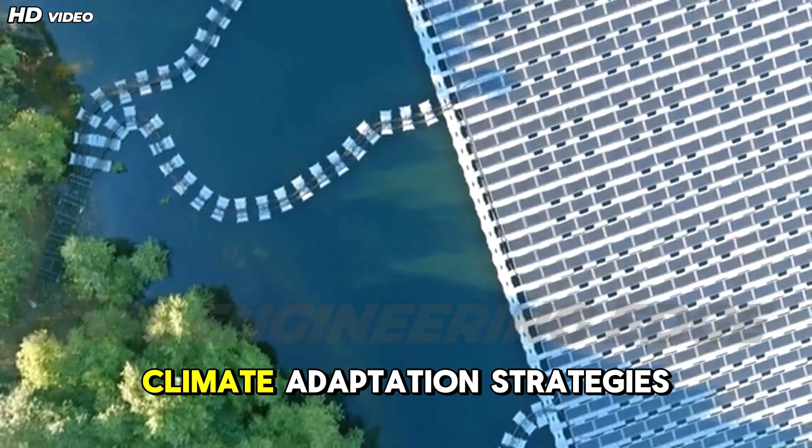The philosophical transformation is profound. Rather than defending coastlines endlessly with higher seawalls, humanity adapts by expanding into water environments responsibly. Organizations like the United Nations Environment Programme advocate for sustainable climate adaptation strategies. Floating infrastructure embodies proactive adaptation rather than reactive defense.

In conclusion, resilient floating foundations do more than solve a climate crisis, they redefine civilization's relationship with the planet. Rising seas no longer signify retreat. They signal expansion into a new engineered frontier. A real-world example of a scalable floating city model.

One of the strongest real-world examples aligning with the vision of scalable, autonomous floating civilizations is the Oceanix Busan prototype in Busan, developed in collaboration with UN-Habitat and the ocean engineering company Oceanix. This project is not just conceptual architecture, it is a fully engineered floating urban district designed for long-term climate adaptation.

Oceanix Busan is structured around modular hexagonal platforms, directly reflecting the honeycomb pontoon strategy discussed earlier. Each platform is engineered to support mixed-use development, residential towers, research hubs, agricultural greenhouses, and public spaces while maintaining independent buoyancy and stability. The modules interconnect to form larger districts, demonstrating scalability without compromising hydrostatic equilibrium.

The city integrates zero-carbon energy systems, including floating solar panels and on-site renewable microgrids. Desalination units powered by renewable energy provide freshwater independence. Waste is processed using circular systems to minimize emissions and landfill dependency. The platform is designed to withstand typhoon-level storm surges while adjusting vertically with tidal fluctuations.

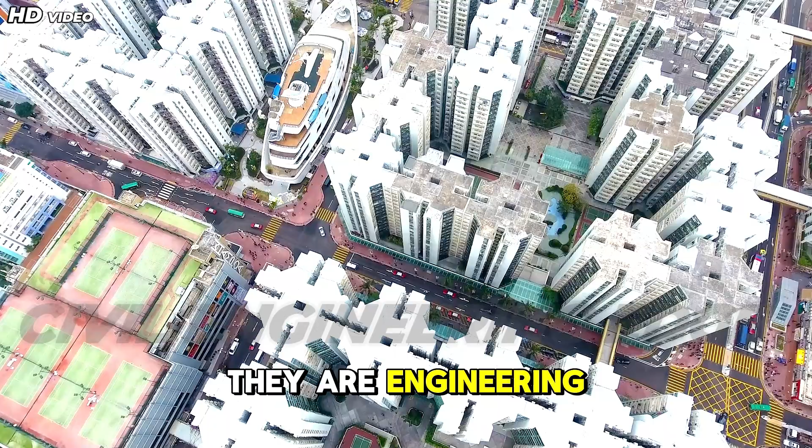It serves as a blueprint for coastal nations facing rising sea levels, demonstrating that ocean-based urban expansion can be structurally sound, environmentally responsible, and economically viable. This example bridges the gap between concept and implementation, turning maritime urbanism into a scalable civil engineering solution.

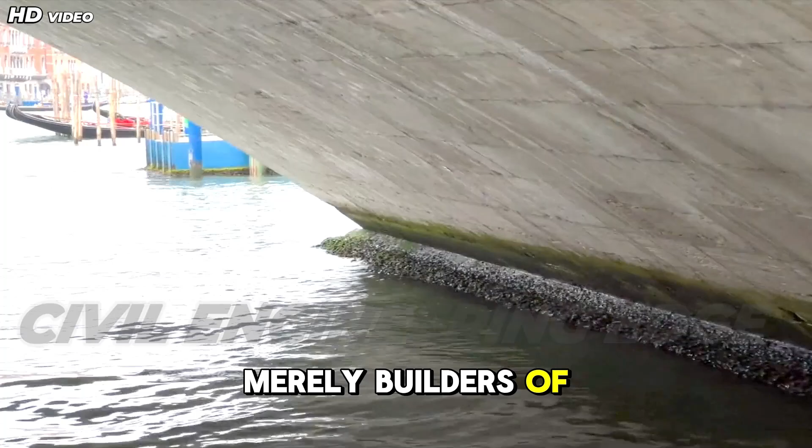As civil engineers, we are not merely builders of structures, we are architects of humanity's future. Rising sea levels represent one of the greatest infrastructure challenges of our time. But as we've explored today, the solution is not limited to taller seawalls or endless land reclamation. The solution may lie in reimagining the very foundation on which civilization stands.

Floating cities demonstrate how engineering innovation, modular honeycomb pontoons, advanced composites, AI-driven mooring systems, renewable microgrids, can transform a climate threat into a new frontier of opportunity. The oceans cover more than 70% of our planet. Instead of retreating from them, we can responsibly expand into them, designing resilient, adaptive, and sustainable maritime civilizations.

If you are a civil engineer, student, or infrastructure professional, this is your era. The future of urban development may not be built on land, but on water.